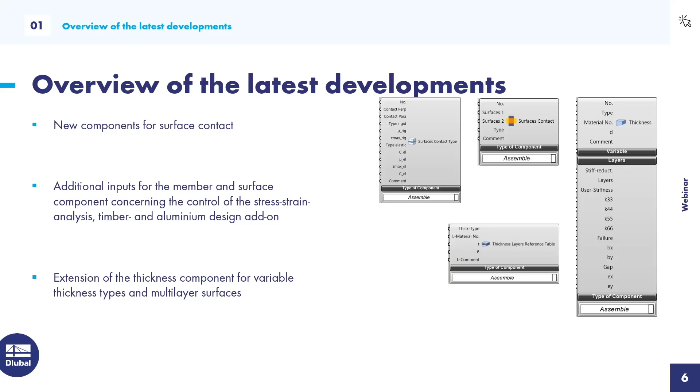I think the key feature is here the template functionality that we implemented a while ago into our export component. And the last feature that I will show here in the PowerPoint presentation is the extension of the thickness component for variable thickness types and multi-layer surfaces. This obviously will be a topic of today's live demonstration. The last feature that I would like to show here is actually related to the installation process of Rhino. So let me show you Rhino 8 in a second here.

In the past, the plugin could be installed via a specific folder in the RFEM 6 program folder. We changed it. Everyone can install the plugin now via the Rhino package manager. So if you go into Rhino and you call up the package manager, you can search for Dlubal here, and you can see the Dlubal plugin, and here you have various versions of the plugin.

An important information for you: in case you're using Rhino 7, you should use the versions with the number 7 in the front. And in case of Rhino 8, use the versions with the version number starting with the 8. For today's webinar, I'm using, let's say, an internal version. Anyway, you can do the exact same algorithm in the current customer version of the plugin.

All right, then let's switch to the second chapter of today's webinar, the live demonstration. To give you a feeling for what I'm doing in Grasshopper, I would like to show you the final structure first in RFEM, and then hop right into Rhino 8. So that's the CLT structure that I would like to model. It should represent like a bus or train station, where you can wait for your train or for the bus, and you're protected against rain and wind and so on.

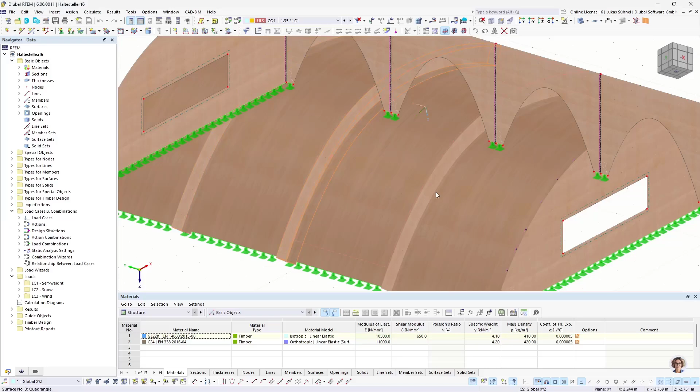So you have here these CLT wall, slab and wall elements, and inside some additional timber beams that support the roof, and on the front some openings to go to the train, and on the side some windows to see if the train or the bus is coming. Obviously a made up example, but it serves the purpose of today's webinar.

I would like to show you the workflow and some new components. What do we have here as well? We have some line supports on the bottom, and additionally some line hinges, because CLT panels are usually connected hinged. So we need the line hinges as a tool here to have the proper force transfer. That's also the most tricky part of this whole algorithm. I will explain it, of course, afterwards.

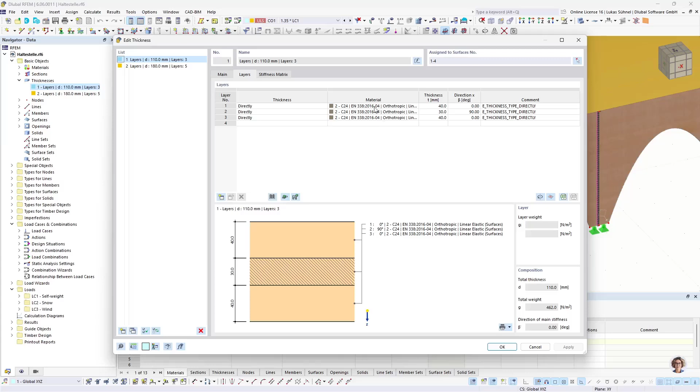And apart from that, we have, of course, our new layer thickness types in here, in which we then define the layers individually. All right. That should be it as a rough introduction of the structure. Let's go right into Rhino 8, and here I will put Rhino to the left and Grasshopper to the right in a second.

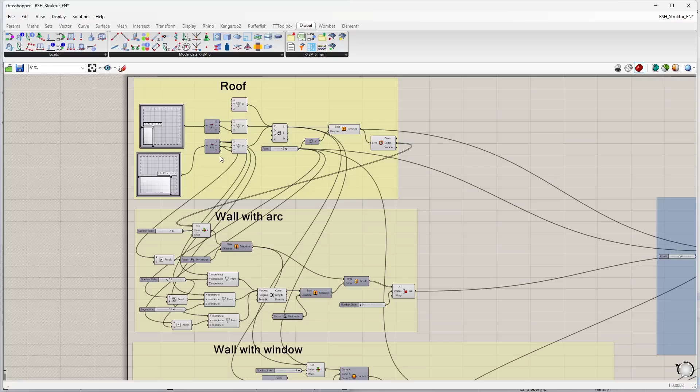One more little overview for you, what I will do in the next hour or so. I will create this algorithm here. We start with the Grasshopper algorithm, where I model the roof of the structure, then the walls with the arc, the wall with the window, then some data management, copying and so on, collecting my objects, the surfaces, the lines that I will use again afterwards, and then the connection to RFEM via our Dlubal plugin.

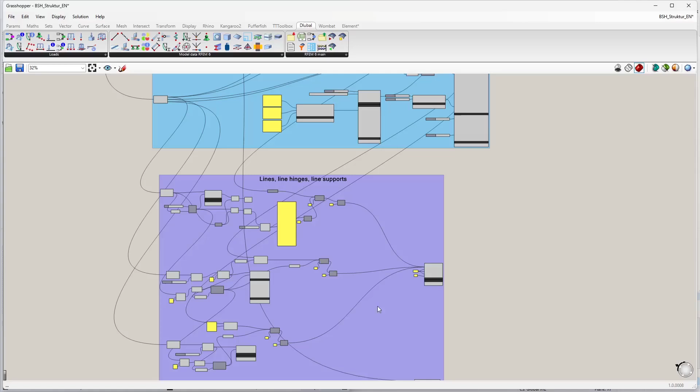I will create materials, sections and members, thicknesses and surfaces, and last but not least, lines, line hinges and line supports. All of those components then will be connected with our export component, and we get the structure in RFEM 6. All right, so let's create a new file in Grasshopper, move it to the right hand side of the screen, and start with the modeling.

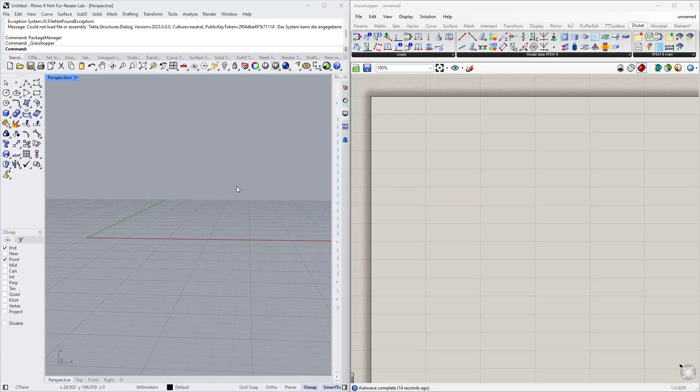As I said, I would like to begin with the Grasshopper algorithm, so I need a plan how to model that, and I will start with the roof. The roof was curved, and therefore I need some kind of a curve with the interpolate component. The interpolate component requires the nodes. You can see it basically on this little icon here. You need to define the nodes and then it will interpolate a line or a curve.

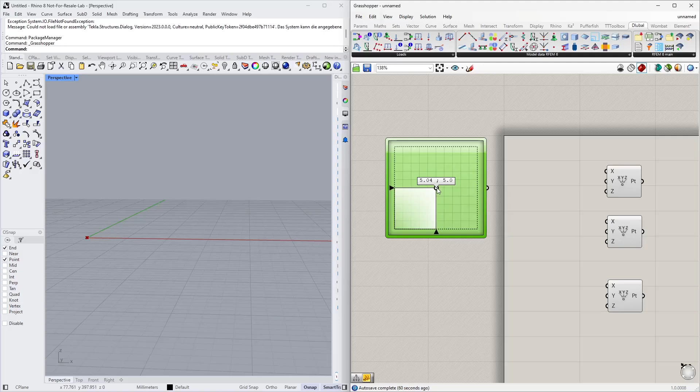And therefore I need 3 nodes and I use the construct point component for that. The coordinates of those nodes should be defined with MD sliders. This MD slider's properties will be changed a bit, so from 0 to 10. So with this slider I can define basically a node, a coordinate x, y, z. Z, however, is always 0 here, so I change x and y coordinates by moving this little dot.

Now my curve will be in the xz plane, therefore I need to deconstruct the node that I get here. So I deconstruct the node and I build it again just using different coordinates. So x should remain as the x coordinate. The y coordinate, which I can modify here, should be the z coordinate. Actually that's already the second node, my bad. The first node should be at 0, 0, 0. So that's the first node here in the center of origin.

The second node, which I can modify now with the MD slider. And the third node should also be modified via an MD slider. So same logic. Y should be set. And now I can define this arc. Let's pick some proper coordinates. And now I can connect it to my interpolate component and I have a curve. So that could be the shape of my structure, for example.

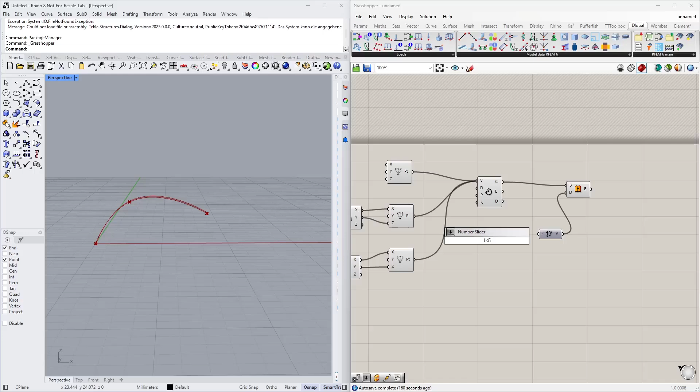Alright, now I need a surface, so I can simply extrude this curve into the y direction. And I want to define a distance via a slider, so I define a slider from 1 to 5, for example, using the metric units here in my head. So now I can extrude this line into a surface. Alright, that's already the first part of my little algorithm.

And I group it, and for a better understanding I can give it a little name. So that's my roof surface, for example. Okay. Alright, so second part is the wall on the front. Let me show it again in RFEM so you can follow easier. I want to create this wall now with the arc-like opening.

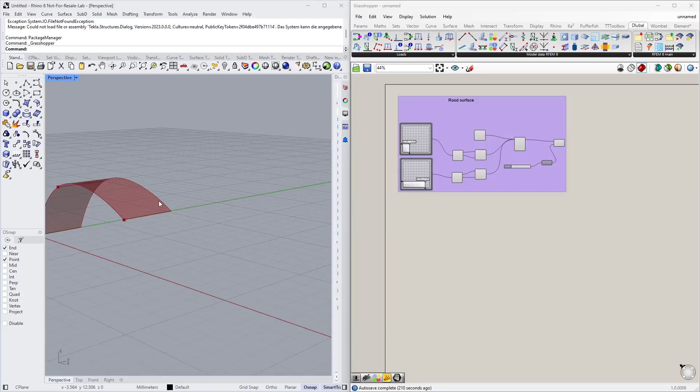So what I need for that is this line here, and I want to extrude it into the Z direction. To get access to this line, I will deconstruct that surface. Therefore I have here the deconstruct brep command. I link it to my surface.

Now I have here the faces, the edges, and the definition nodes. And I need just one of these edges, so I take a list item component, connect it here, then define the little slider to select the line from that list. Let's see which it is. Index 0 is the one on the end, on the bottom. Index 1 is this arc. Index 2 is the line that I need.

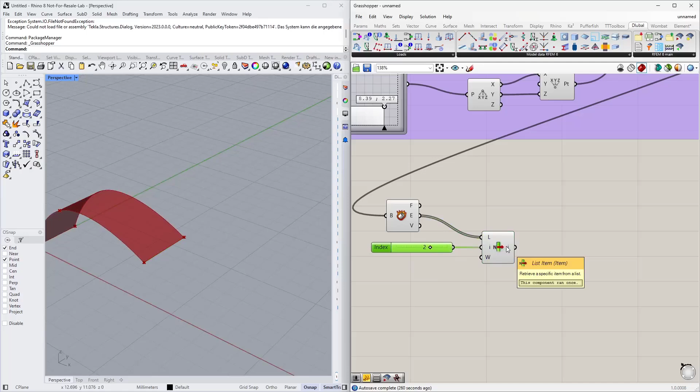Alright, so I have this single line in this component now, and now I simply extrude it again in the Z direction. And we can already see it is the wrong direction. So I probably need to multiply it by -1. And the coordinate itself comes from my arc or my curve that I defined in the beginning. It's the Z component or Z coordinate of that node. So obviously the Y coordinate here, and multiplied by -1.

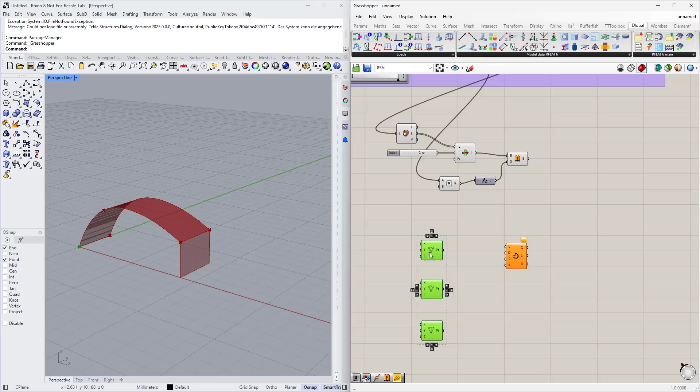Now I need the opening. For the opening, I also use the interpolate component again, and I need again 3 nodes. All right. Sorting can be done at the end of the day. So where should the first node be? Basically, all of the nodes have the same X location as the wall or the end point of my curve. So the X coordinate is always the coordinate from the last point of my curve. And now I need to modify the Y and the Z coordinates.

The first node should only move slightly in Y direction, so I make a small number slider, and I want to have floating points, so I change the type of it and connect it to the Y coordinate. So this distance that I define here via this node is basically the length of my wall support on the bottom.

The second point should be in the center. Center basically means the dimension of the extrusion divided by 2. So divide by 2. Link it to the length of the extrusion, and that's my Y coordinate for the center point. And I need a number slider to modify the Z coordinate. Maybe also with floating points, so like that.

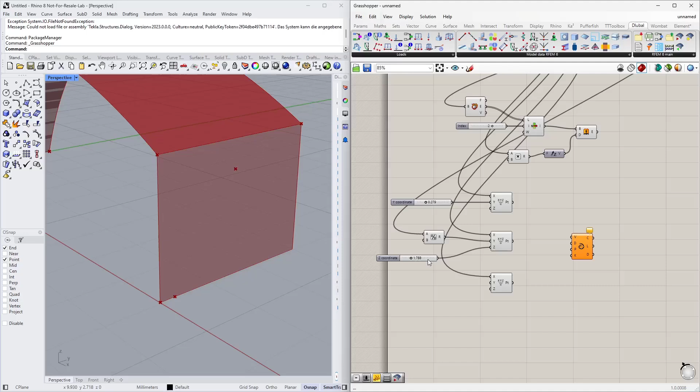And the last point is again on Z on the bottom of the surface, and it should have the same distance as the first point. So again, I just do a little subtraction. I subtract my required support length from the extrusion length. That's the Y coordinate. So whenever I change the length of the support, it will change on both sides. All right, these are my 3 definition nodes for my curve. And now we can see it.

The next step is, let's say, like a trim command. I would like to cut out this part of the arc from the rest of the surface. I can do that with the component split brep. The base surface is this one, and the so-called cutting shape is a surface. So I need to extrude my arc again into X direction to get a surface for it. So actually extrude first, in X direction. Yeah, just any surface. And now I can use it to cut the original shape.

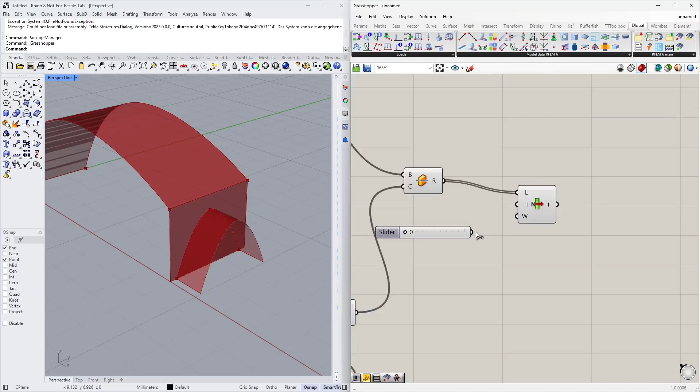I get here 2 surfaces now. I just need one of them. So again, a list command to pick one of those indexes, and a little slider to select the right one. So index 0 is, let's say, the surface of the opening. Index 1 is the remaining surface, and this one I want to keep. So let me hide some of the other objects to see the result of my little algorithm. That's the remaining surface. That's the one I need for later.

So I already finished the second part here. Again, I could give it a name. Arc, surface, whatever. Just so that I can easily understand what I'm doing even a couple of weeks later.

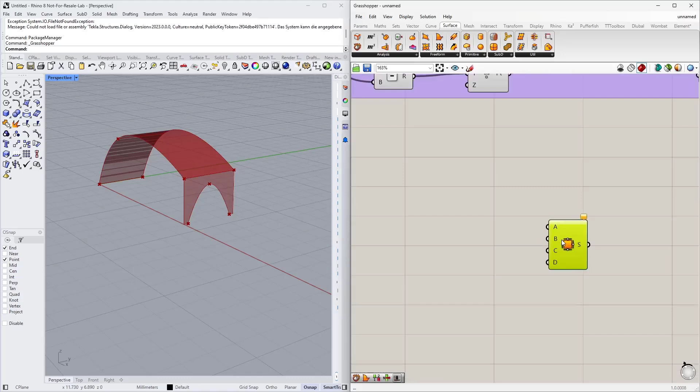And now the last surface is the surface in the front. To create that, I would like to use the edge surface component. I only have to define the boundary lines. One of my boundary lines is, of course, my curve that I defined in the beginning, like from the roof. And the second curve for my surface should be this side line of my front surface.

So again, I deconstruct this surface here in the front, and I try to select this line here on the side. Again with the list item component.

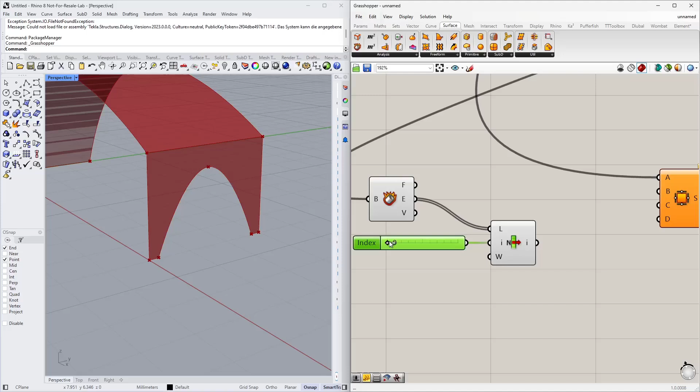Let's connect a slider to it, and now let's go through these lines to see which of them it is. Oh, sorry, the edge lines, of course, obviously. So that's the other side. Oh, come on. Yeah, now I have it already, index number 2. It is, yeah, that's the line I need. So I connect it again to that surface component, and I already get the final shape.

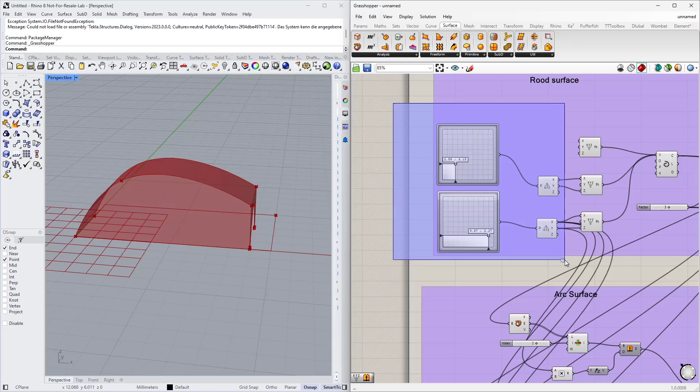So far so good. Now I need to cut out a rectangular hole in here. Same logic as before. I will create the rectangle in this case by 2 points. Yeah, the 2 points are A and B. And then I extrude the rectangle and then cut it again from the original surface. These 2 definition nodes of the rectangle can or shall be defined again via an MD slider. So I just copy some of those things here, copy, paste, and I will reuse it down here.

This time, yeah, no, actually that's already okay. I can connect them as definition nodes for my rectangle. The rectangle can be placed in any plane, as you can imagine. So I can define the plane by setting it here graphically, or in the Rhino lock, or however you call this area here on top. And I would like to have the rectangle in this ZX plane. Okay, yeah, that's now on the right plane.

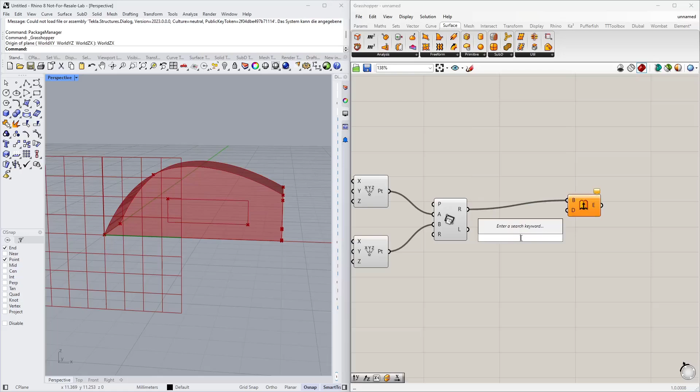Let's set some proper coordinates for the rectangle. So maybe that's the size of the window that I would like to have, and now I have my rectangle here. Again, I extrude it into the Y direction, and now I can use the split command again, split brep, to cut out a hole. Let me copy the list item that I defined on top here. Again, I want to keep only one of those surfaces, and this time I think it is the index 0.

Exactly, yeah. So let's hide some stuff to see the result of our work here. Yeah, that's the remaining surface with the opening, the rectangle opening. All right. That's already the basic geometry that I need. And now I can copy this stuff. Sidewall, let's say. Okay. Now let's copy the surfaces. That can be done with the move command or move component. And which objects do I want to copy? Of course, my roof surface and my front surface.

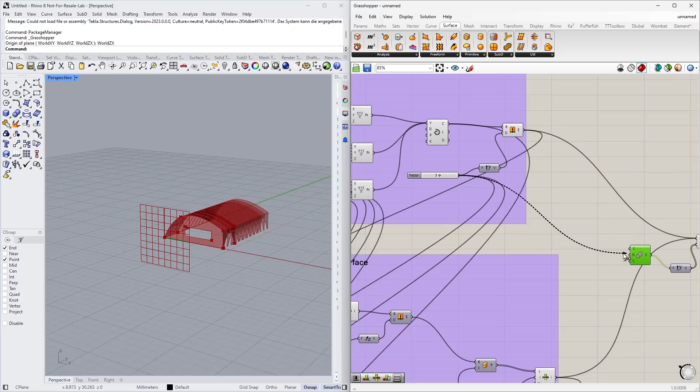And the default is set, as you can see. Yeah, it's copying it in the vertical direction, which is not correct. I want to copy them in the Y direction. And I want to copy them multiple times. For copying something multiple times, you can combine a move command with the series component, and as a step I would like to use the extrusion length, of course, to have them placed next to each other. Now I can control the amount of copies with a small slider, let's say 4 copies. All right.

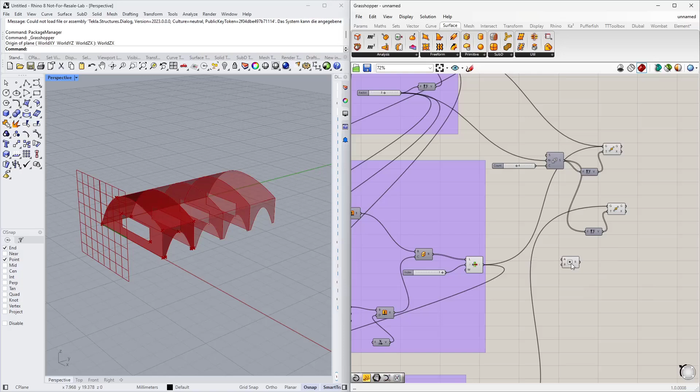That's a big part of the structure. Now I only have to copy the front surface to the end. So I use another move command for that. And I copy this surface. Of course, not multiple times. I only want to have it one time. And then the distance for this is actually a little multiplication. We simply multiply the extrusion length with the amount of copies. And that's the length that we need to copy it from the front to the end. Okay. So far so good.

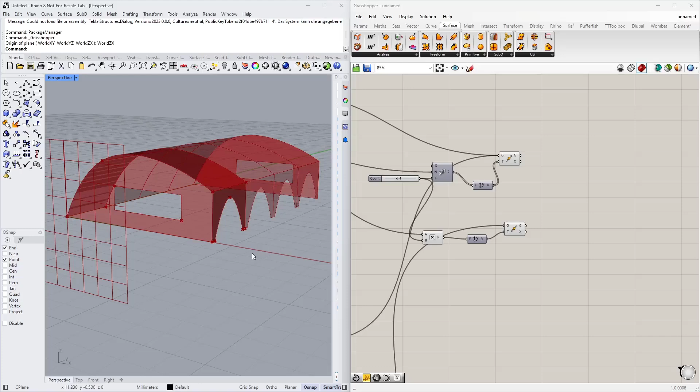The geometry is done. What I need now is a little bit of data management, because afterwards, thinking of the RFEM 6 connection, I need a collection of lines. I need the collection of lines on the bottom, all of those down here, because on those lines I would like to assign a line support. And I can use these lines in my line support component to export it to RFEM 6 afterwards. Additionally, I need these 3 internal curves, because I want to assign a member or a cross section to them. And maybe also a collection of all of the surfaces that I have.

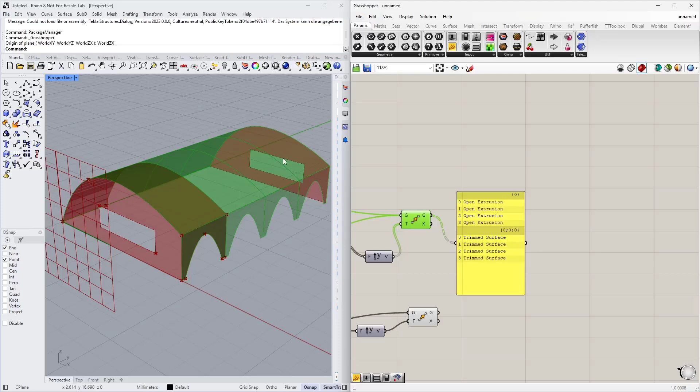So maybe let's start with the curves for the beams. How do I get those? They are basically inside that component. This component contains all the surfaces from the roof and from the front. Now, if we take a look at the data in that component, we see that it has 2 groups. Let's call it 1: 4 open extrusions. These are my roof surfaces, and in the second group, my wall surfaces.

So what I can do here is I can explode this tree and get each branch of my tree, or get access to each of these branches. First branch, second branch. And the first branch, as I said, contains the surfaces of the roof, and I can deconstruct them again.

So you can see it here again. Those are the surfaces, and of course the boundary lines and so on. And now I would like to select only these internal curves, so basically just one of those lines per surface. So I need again a list item component from my edges, and let's see which of the index numbers it will be.

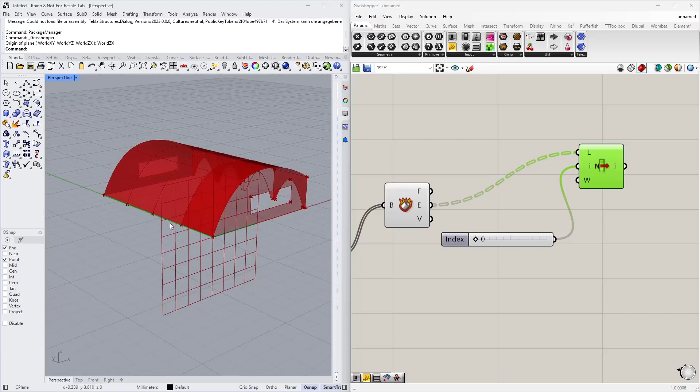Index 0 is the lines on the bottom. I need that maybe later for my line supports. I'm looking for the roof curves. And index number 1 is the one that I need. It contains these curves. However, it contains 4 and not just the 3 that I need.

So what I can do now is get rid of the last index from that list. Currently, it is not a list. It is, let's say, a tree. On each branch of the tree, I have 1 curve, but I can make a list out of it by flattening this tree. And now I remove the last index. It can be done by using the cull index component. And the last index can be defined by a panel with the -1 value. And the remaining lines are the ones that I need for my beams.

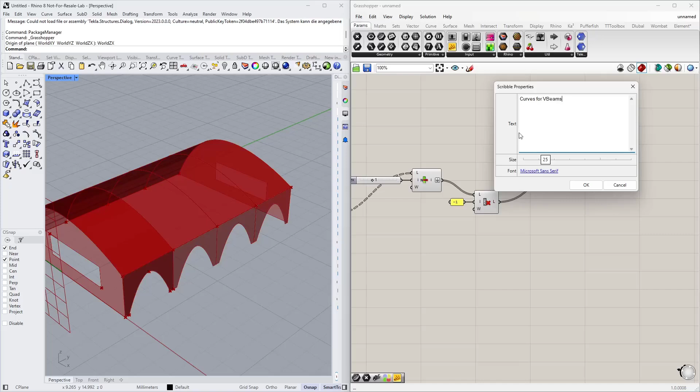So let me collect that in an additional component so I can easily reuse it afterwards. Maybe again a little comment here: curves for beams. Okay.

Now, the second part should be the curves for my line supports. We already saw it in that component. Here I can select the curves on the bottom of those roof surfaces. It was index 0, so that's already one part for my line supports. And the other bottom lines are included in the wall surfaces.

So basically I can copy this part, connect it to my surfaces here in the front, and now look for the index number of those walls. Which of those lines are the ones on the bottom? So I scroll through that. Index number 1, as we can see. And now my slider is not long enough, but I can tell you that it's index number 5. So I need index 1 and index 5. So I create a little list, 1, 5, and connect it to that component.

So this list item gives me now 2 lines, index 1 and index 5. And you can hopefully see that it's the line on the bottom, on the right and on the left side.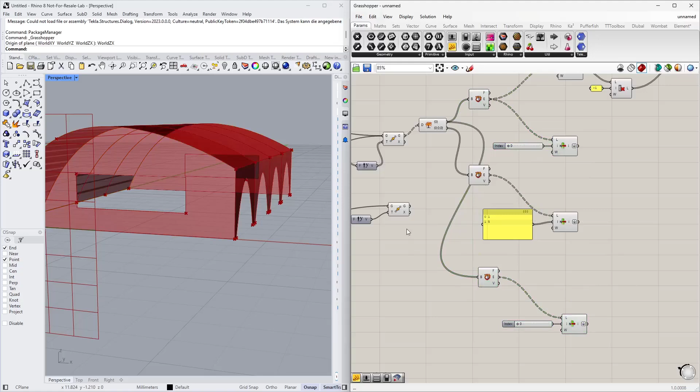Now I need the bottom line from the side surfaces. Same procedure. I copy again this part. I connect it to my, well, actually I need 2 surfaces: the front surface, which is down here, and also the copied surface from the back. And from both surfaces I need 1 line. We can already see it is index 0. So in here I have now 2 lines, and these are the lines that I need.

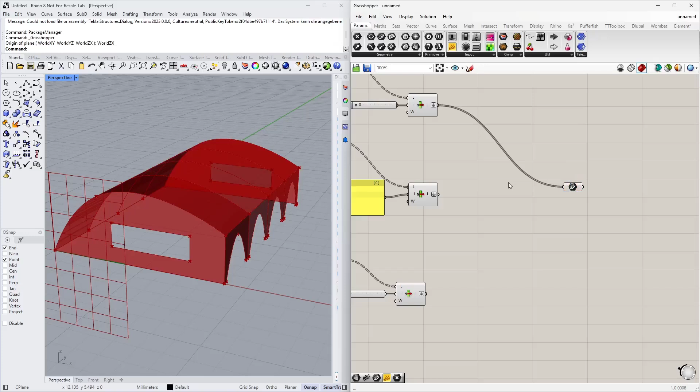I can collect all of them in one component again. So just connect them to the curve component, and that component contains now all the bottom lines for my line supports. So again, give it a little description: line support lines. Okay.

And then I also collect my surfaces in a surface component. I think most of them are contained in that component where I copied them. And additionally, I have the front wall and the wall on the back, which is in here. So this surface component contains now all surfaces. All right.

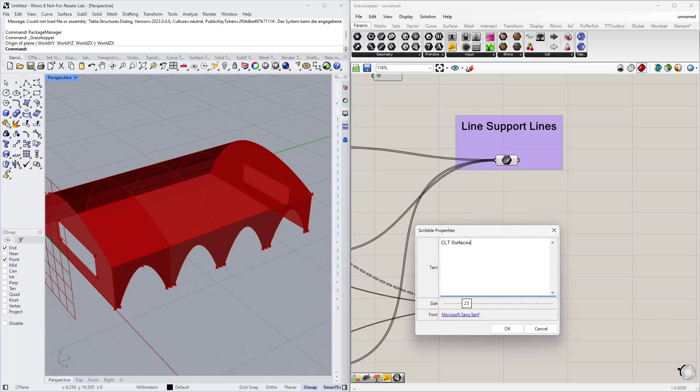So far, so good. Now, the next part is the connection to RFEM 6. Therefore I need my Dlubal plugin. Let me increase Grasshopper for a second. The Dlubal plugin will show up after you install it, and it is divided in 3 parts. We have the model data group, which contains most of the basic objects: nodes, lines, members, surfaces, materials, sections, also components for solids, for thicknesses, supports. I think most of the stuff that you need is implemented in here.

We have another group which is called loads. In here you have components to create load cases, load combinations, but also the loads: nodal loads, line loads, member loads, surface loads, but also imperfections, in case you want to assign them as well. And the last group contains general components, for example the export component, import component, a component that allows you to run the calculation of RFEM 6 via Grasshopper, or other components. For example, as I said, I use in the internal version the global mesh setting component.

All right, how do we start? I think RFEM gives us a nice hint here. The data navigator in RFEM shows us the basic objects and then specific objects, types for nodes. And it's kind of the logic that you use when you're defining your structure. First you define materials, then the sections and the thicknesses. Then you continue maybe with members and with surfaces and solids and so on. And the same logic we use in Grasshopper. I start with the definition of my materials and sections.

The material component can be found here. A material can be defined by the index number that it should get in RFEM 6 and the name. The name ideally equals the name of this table down here. So you can define your material in RFEM and copy the name. By the way, to get the full name, you can check the program options and see if you have the full section and full material description activated in here.

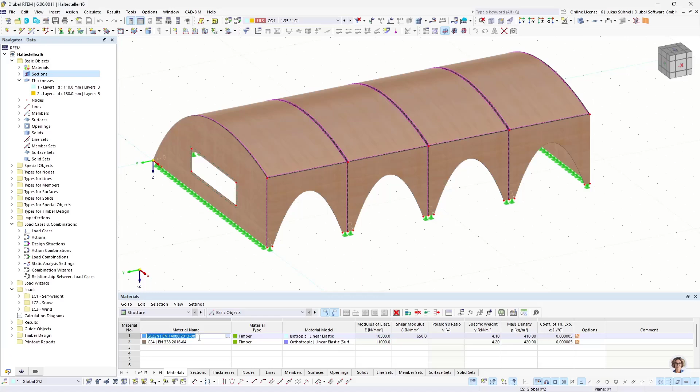If you do not have this option activated, you only see GL22H - the code related part of the name will not be shown. But to have a clear assignment of a material, you need also the standard, so we can copy that name and paste it into Grasshopper.

Alternatively, if you had previous projects and already defined materials and sections, you may have created your own little library of materials and sections that you use again and again. That's what I did - I defined here a value list and put my own information into that value list.

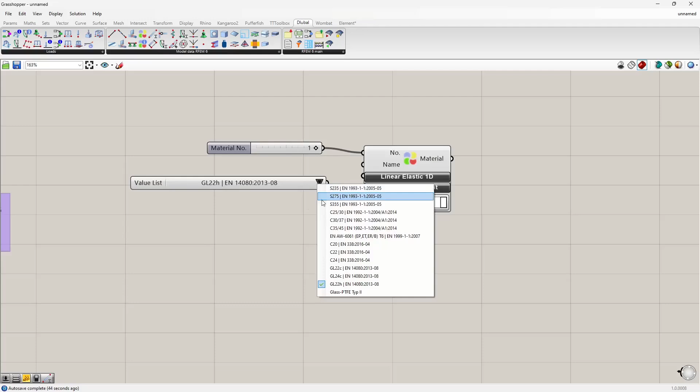You can edit this value list and insert the names into it. That's the name that it shows here, and that's the name behind that little description - identical for me here, but you can simply copy these things. Then you select the material you want from that list and assign it to the name input, and that's all you need to do.

I copy my material - I need a second one. Make sure you change the index number. Then I select here the material C24. The first material is for my beams, and the second one should be for my CLT surfaces.

For surfaces, we have to use the orthotropic 2D material model, or at least that's what I want to use. So I use a value list to read the options of this material model input and select orthotropic 2D.

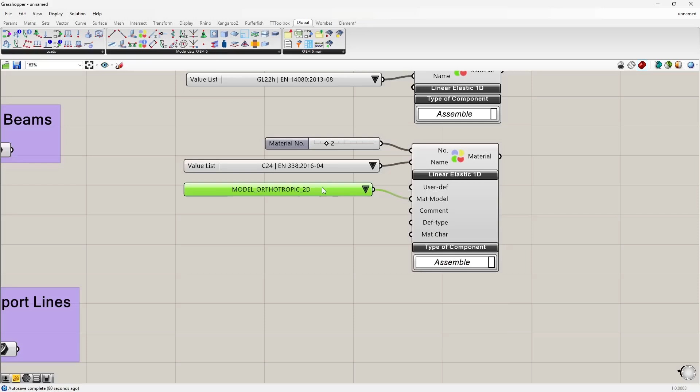Now, the next step should be the definition of a section. We have the section component for my beams. Again, I assign a name, a number, and I have to assign a material and the name. The material I can link directly from the material component to the section component.

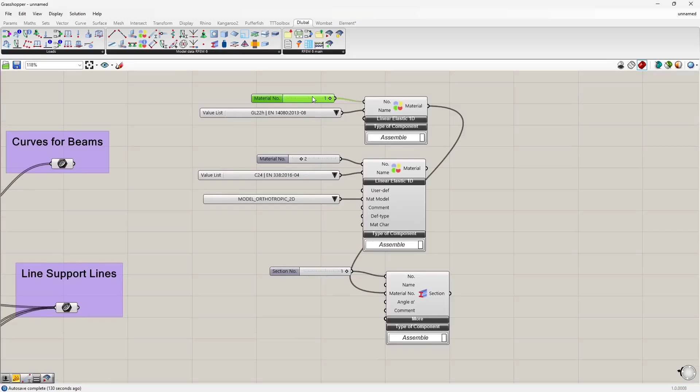This step can only be done if I define the index number first, because what we expect in this section component is the material index number - 1, 2, 3, 4, 5. To transfer it from that component to this one, I have to assign it here first. If I do not assign it, this connection will not work. That's why, personally, I define usually all these index numbers for all my components, so I can link them together.

Now the last thing is the name. The name is quite easy - it's RM1, rectangular massive section, then the width and the height. I could copy the string and paste it into Grasshopper, or build it parametrically. The name is just a bunch of strings combined - text, brackets, and the name consists of the part RM1, then a value for the width of my section.

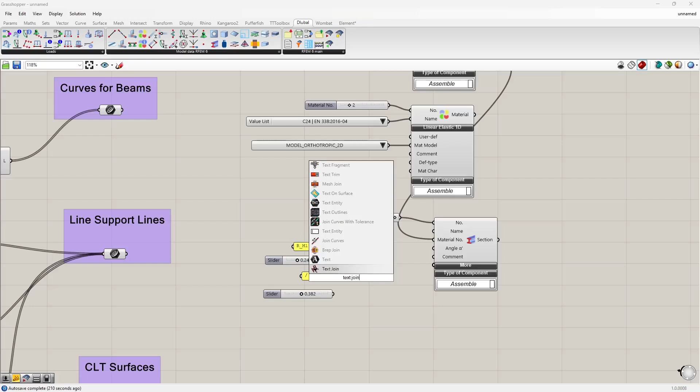And I use here a slider from 0 to 1 - I'll explain it in a second. Then the next part of the name is the slash, and then another slider for the height of the section. All these parts of the name can be joined by a text join component - you just plug it into this input here.

And you get the name, or you get one string out of it. Let me show it - here we are missing the space. Okay, so that's now the name according to RFEM.

There is just one little difference. You can see here I'm using, let's say, meters in my mind - 0.24 meters and not millimeters as it is shown in RFEM. This has the following reason: the Grasshopper link is based on our web service, on our API, and this API expects SI units. So I have to define the dimensions of my sections in meters, so that I get the right size in RFEM.

Therefore a scale between 0 to 1. Now I can link it to my name input and the section is done.

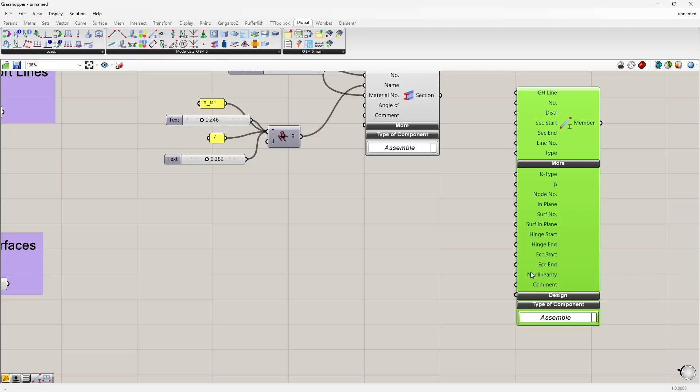Last step for this first group here is the member component - let me show that too. A member component with some basic definition inputs. Under 'more' you can find options for hinges, eccentricities, nonlinearities or rotations for the member, and under 'design' related inputs. Let's start at the beginning.

I need the Grasshopper lines for my members - these 3 lines. Let me rotate the structure. These are the 3 beams, and I already collected them in here. These are the curves, and I connect them to my member component.

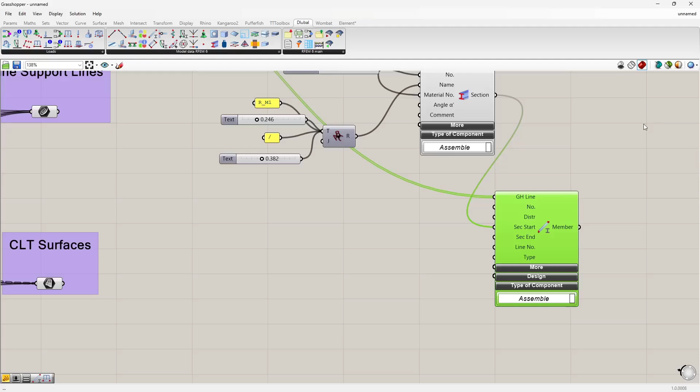The section should be this rectangular section, and that's basically it. There's just one thing that I'd want to define in the member, related to the design. I have timber beams here, and I would like to feed already some timber design related settings, so that when I export it to RFEM, I have most of the information already defined for the design, and I just have to calculate it.

So I have some inputs here, as usually for steel, aluminum, then T for timber, and for timber I can define the type of the effective length, or the index number of the effective length type, and the index number of the ultimate limit state configuration, or the index number of the service class.

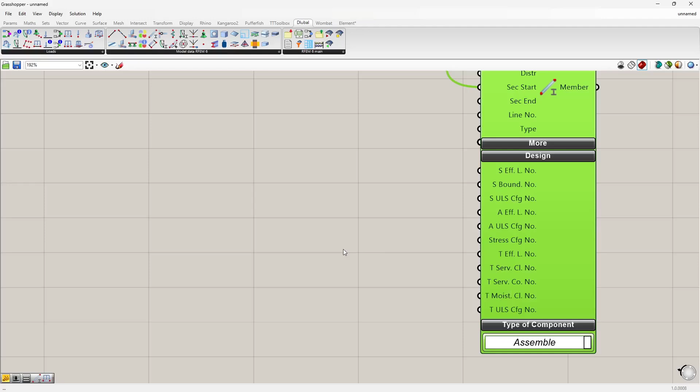I can't define these classes in Grasshopper, but I can define the index number of the existing type. Now you may ask, which existing type? We never defined them. That's where the templates come into play, and I will explain it at the end of this webinar, how it is working.

So let me define these types. I used index number 1, and again, more details I will show at the end when I explain templates. So that's already my first part. Let's group it: materials, sections, and members.

Now the second part for my connection to RFEM are surfaces and thicknesses. Let's have a quick look again at RFEM. A surface consists of, usually the main input for a surface is the thickness type, what material and which thickness is defined in here, and it will be assigned to the surface. So let's have a look into the thickness type itself.

Here we have different types: uniform, for concrete slabs, uniform thickness type, variable, and also layers. In case of layers, we have a table included where we define each layer, the material, the thickness, and the direction of this layer.

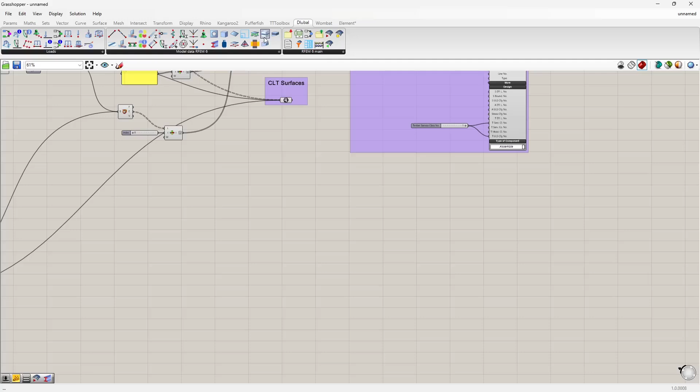Okay, that's what I have to define here, or in Grasshopper. So let's start with the thickness component, which we have here. The thickness component, again, needs a number or an index number. Then the type, I can use the value list for that. In 99% of the cases, the tooltip will tell you what kind of input is required. You can see it here, value list. So I connect it.

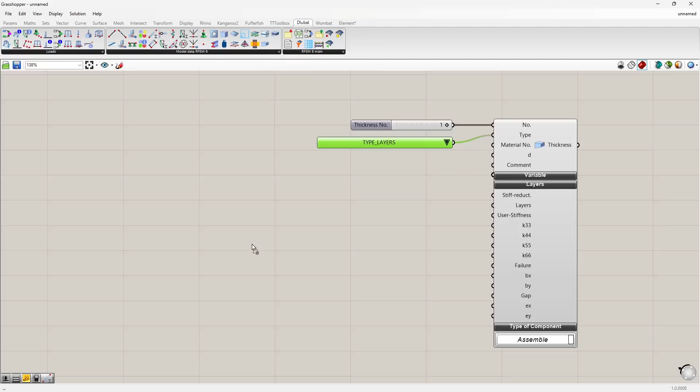And I can select here layers. In case of layers, I can open the layers tab in this component, and here I have the layers input. The layers will be defined in an additional component. We had to split it up. So in that additional component, I define the material, the thickness, and the direction. This little table that I displayed in RFEM 6, this information will then be transferred to the thickness component.

All right, the material should be material number 2, C24, orthotropic material model. The thickness can be defined in a little table. Let's say 0.4, 0.3, again meters, 0.4. And that should be a list.

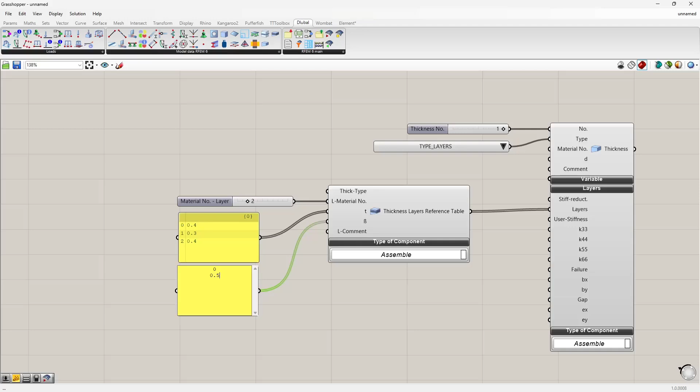And the same logic for my rotations. The direction of each layer should be 0, 0.5 multiplied by pi, 90 degrees, and 0 again. This is the little subtable which I showed in RFEM, and it is connected to the thickness component.

We have a lot of additional inputs in here. I can show them as well in RFEM. I do not use them today, but in case you want to apply a stiffness reduction to these CLT thicknesses, you can activate them with this button, and then you have access to these modification factors and additional options, and all of them are included in our component, as you can see here.

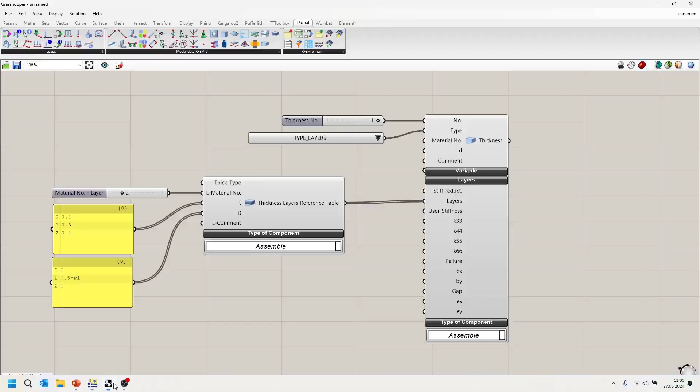So that's the thickness that I want to create. Now I need to connect it to a surface component, and the surface component expects additionally the Grasshopper surface.

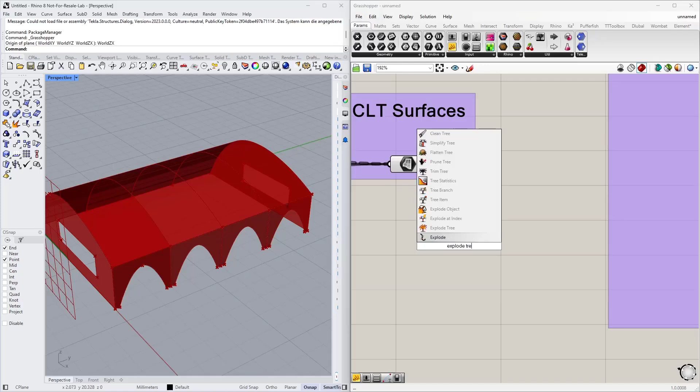Now I want to use that thickness type for the roof surfaces. That surface component here, let me show it again like this, contains all surfaces, again in a tree-like structure. I showed it before, 3 groups. My roof surfaces are in group 1, so what I will do here is explode the tree that I have here.

I need it later as well, use the surfaces from the first branch for my surface component. The last step here is the numbering. As I said, I tend to number all my surfaces, so that can be done with the series component. This number, the index number, starts with the value 1. So I define here for the start index number 1. The step is of course 1, 1, 2, 3, 4, and the amount of index numbers that I need is linked to the length of this list. I have 4 surfaces inside, depending how many copies I create in my Grasshopper algorithm.

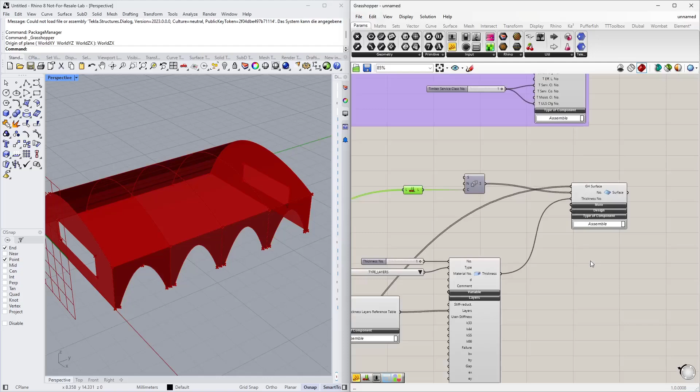So the length of that list is basically the amount of copies that I need. I can count the length with the list length component and connect it here to the amount of copies. Now I get a list of 4 index numbers, 1, 2, 3, 4. That's what I need for my surface. All right, that's the surface component.

And now I need another surface component for my walls. So I simply copy all this stuff.

Copy paste. This time I want to use the remaining surfaces. So these are my front surfaces and these are my surfaces from the side, and I connect it as Grasshopper input.

Concerning the thickness for the walls, here I would like to use 5 layers, so I simply copy them. Okay, same for the directions.

And I need to change the index number, obviously, of my thickness. That's second thickness, so index number 2.

Again, the remaining part is the numbering of those surfaces. I will use a series component again, but I'm not going to start from index number 1 as I did before. I need basically the last index number from this numbering plus 1. That's not difficult. The last index I can read via a list item component, and I select here the last index, using -1. So I get the value 4 out of this component, and then I add 1 to it, so +1. And now I have here index number 5.

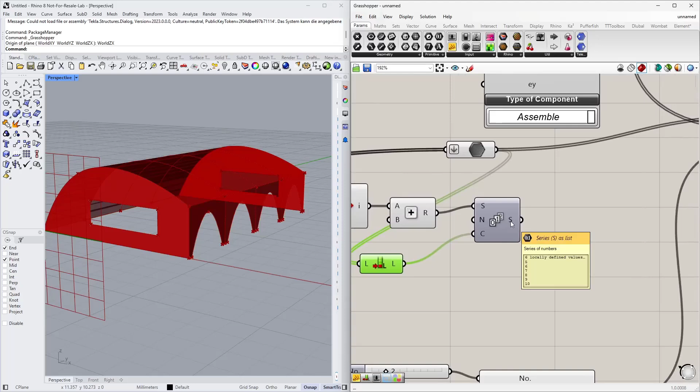This is parametrically defined depending on the amount of copies and so on, and this is my new start value for the numbering of my walls. The step is again 1, and the count is basically the length of that list. Again, it is not a list, it is a tree structure, as you can see here, but if I flatten it, I have a list, and now I can read again the length. Here it is. The length of that list is the amount of copies that I need. So I have here the numbering 5 to 10. That's exactly what I need. 6 values for the numbering, 6 surfaces.

That's good. All right. One more thing that I would like to define here is a mesh refinement. Why? Simply because the default global FE mesh length is 0.5 meter. We have here a distance of about 0.3 meters. So let's have at least 3 elements over this length. So I would like to use an FE mesh for those wall surfaces with a mesh length of 0.1 meters.

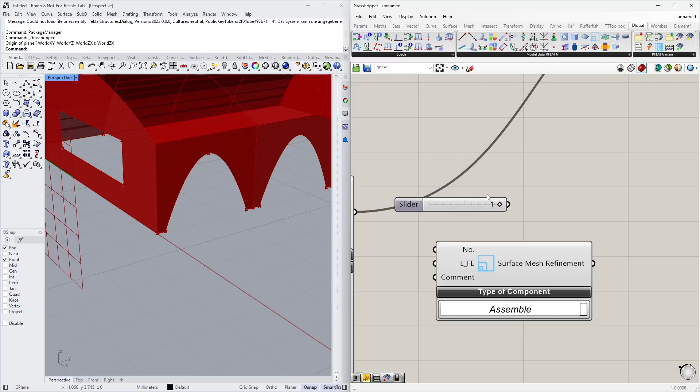Therefore, we have these mesh refinement components. Here's the surface mesh refinement component. I assign the index number and the required length, 0.1. All right, and I simply connect it to the mesh input.

Now, what I forgot also on the surface on top is those are timber surfaces, obviously. And again, I would like to define some things for the design afterwards, the service class and also the ultimate limit state configuration. Therefore, I assign here type number 1 for the ULS configuration, and the same here. Let's extend the design tab, ULS configuration, service class. All right, explanation will follow afterwards.

Now, this is the second big group for the connection to RFEM 6. And now the last part, which is related to the line hinges. This is the most tricky part, I would say, in that example. So let's have a look inside RFEM, how they are defined.

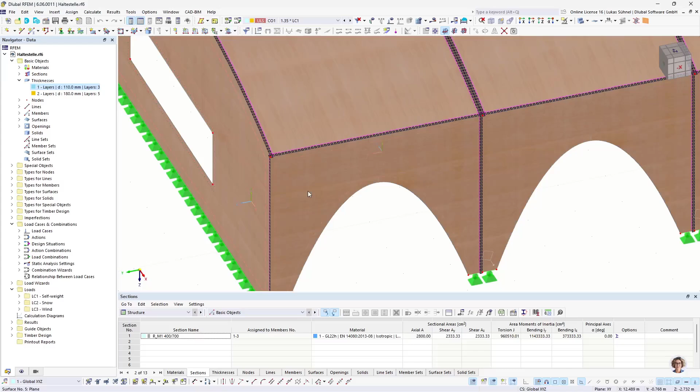Line hinges, as I said, control the force flow between surfaces. And we find them under types for lines, line hinges. Let's have a look. I have just one type here for all of the surfaces. And what we can control here is the hinge conditions, which force should be transferred and which not.

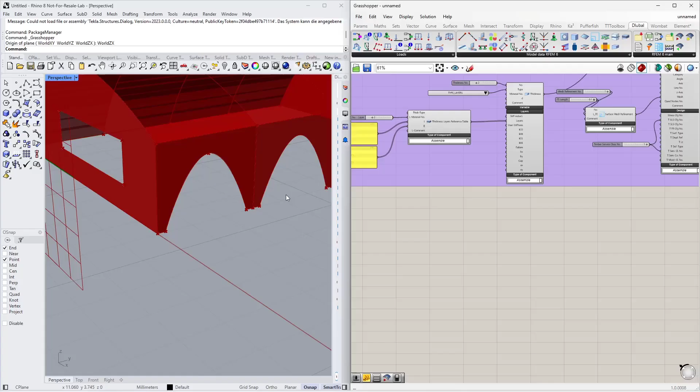So I have to build this string in Grasshopper, and therefore I need the index numbers of my surfaces and of my lines where I would like to have a line hinge. So let's have a look again at Rhino and Grasshopper.

I do have a numbering for my surfaces. Yeah, I did that here. But the lines where I would like to have a line hinge are not numbered. So let's start here. I assign an index number to my lines. Therefore, I use this line component here. And the line component requires the Grasshopper line and, let's say, the index number that I want to assign to it.

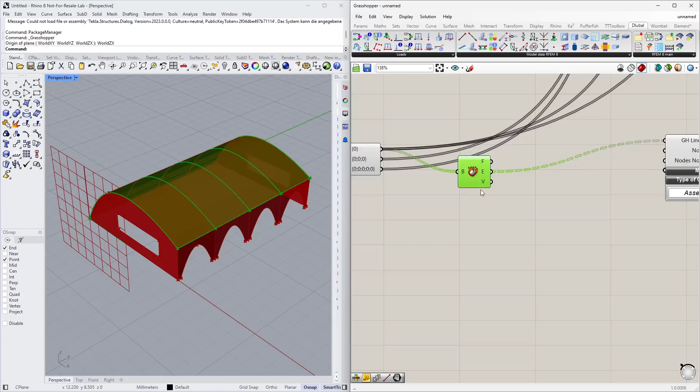The lines for the roof are included in the roof surfaces. I did it multiple times already. I can deconstruct those surfaces. I get my edges out of them, or I get here the edges of those lines, and I can simply say these edges should be numbered, and the number should be starting with the index 1 until the amount of lines that I have here. So I need a series component.

The series component, or the number, should start with index number 1 again, and the amount of copies depends again on the length of this list. Yeah, let me show it quickly. I have here 16 lines, but grouped again. So what I will do is I will make a list out of that group. List length. So I want to use this list.

However, I flatten this tree to get a list, and the last index, 16, I will use for the count. So I get now the values 1 to 16, and these are my index numbers. Sorry, wrong input. Here, number. I also flatten this input here for the Grasshopper line because I need to combine list and list. Otherwise, I will get more lines afterwards. So I have to combine a list with a list. So far so good. All my lines from my roof surfaces have an index number now.

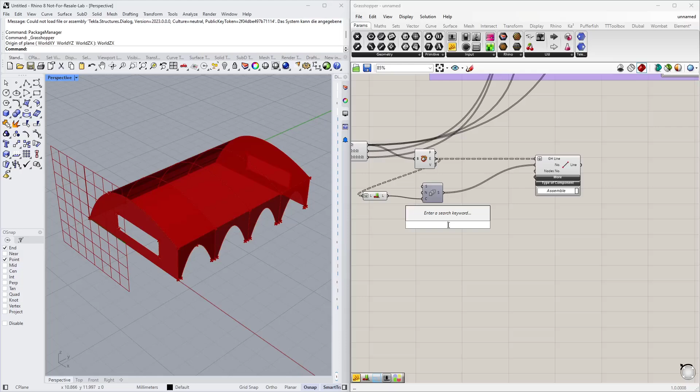And now I somehow need to combine my surface index numbers with my line index numbers. How can I do it? I can do it maybe by collecting the numbers of my surfaces again down here. So this series component, if you remember, contains the 4 index numbers for my roof surfaces. So let me simply bring them down here. So again, I have the same list now here. And let's have a look how the values are shown. I have here the list with the 4 values, and I have here my 16 index numbers for my lines.

If I want to group them in a way that I have always surface 1 with related lines, surface 2 with related lines, a tree-like data structure would come in quite handy. So what I can do is I can graft my numbering to a tree. So each index number will be transferred onto its own branch. You can see it here now. Each of these branches from my tree has 1 value. So I have some kind of grouping now.

And the same grouping I need for these numbers. I would like to have the lines that are related to one surface in one group. I have it already somehow. I have it here. Each surface has these 4 lines, or they are grouped, let's say. And this grouping I would like to assign to my numbering here. How can I do it? I can deconstruct the path. Oh, wrong. Deconstruct path. I can deconstruct the path that I just showed here, where the lines are grouped.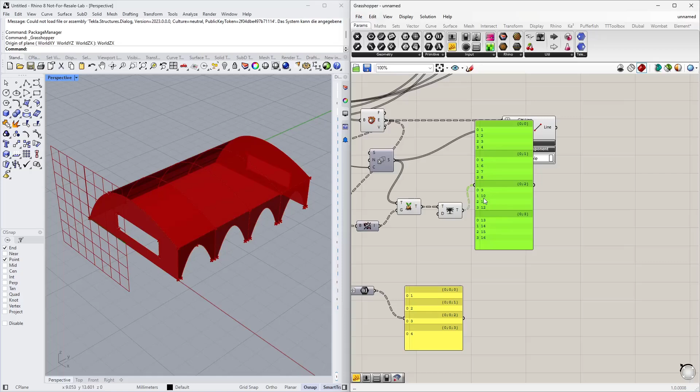Before I do that, I have to get rid of one of those index numbers, because I want to define a line hinge. Or let's say differently, I do not need a line hinge on the bottom lines. I have a line support down here. There's no reason for a line hinge. So I get rid of the index number 0, which is always the bottom line for each group. Easy task, cull index. So we remove one index from the list, the index with the number 0. So now only 3 lines will remain here.

And how can I build the string that I need for my line hinge now? I can use the text join component a couple of times actually to get the desired result. The first thing that I will do is I need these index numbers, the line numbers, split with a comma in a string, not in a list as I have it here. So I join them, and each value should be, is it a comma? I guess. Yeah.

Each value should be divided by a comma. So let's see the result of that. Yeah. 2, 3, 4, 6, 7, 8. Okay. Now I can join my surface numbering with the line numbering.

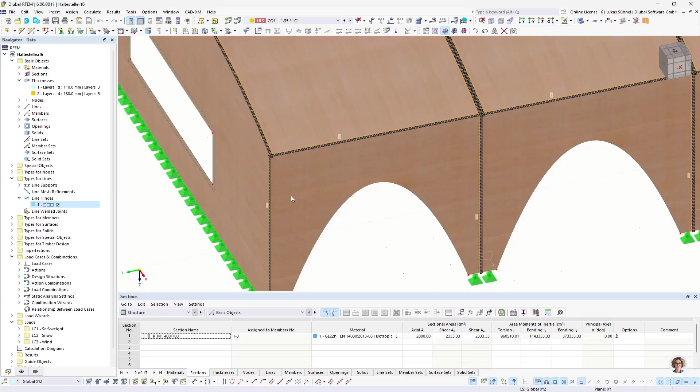So index number 1, surface 1, and then the 3 lines in surface 2 and the 3 lines. Similar to what we have in RFEM. Let me show it again. Surface 1, line 2 to 4. Doesn't matter if we have here 2 to 4 or 2, 3, 4. RFEM will accept our description method, and so on.

And now I need it in one long string, or that's my requirement at least. So I will flatten this result and join it by a semicolon and a space. Okay, and now the result looks like this. And this is exactly how it looks in RFEM.

So far so good. Now let me use a line hinge component, assign a number to it, assign this string to it that I just created and define the connection. So I would like to fix all forces in each direction and release the rotation. You get the information as a tooltip in here. Free rotation is defined by the value 0. Rigid can be defined by inf for infinite, and any other value will be in Newton per meter, in case of a spring.

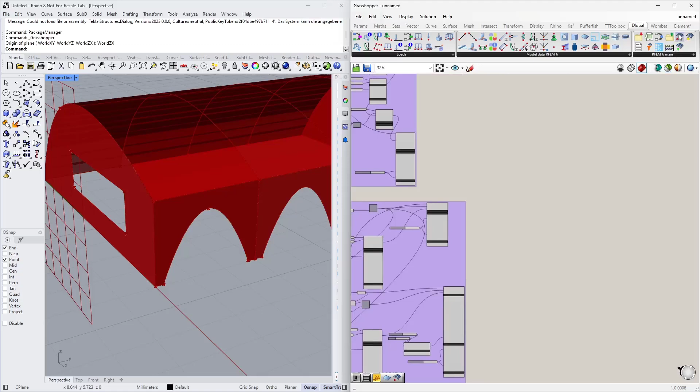You need to number the lines where you would like to have a line hinge. You group it as I did it here, and then you can create this string, assign it to the line hinge component, and you get the line hinges on the desired locations. If you did all that, the next step would be to connect it to an export component. We have it here. That's the export component.

Which inputs are required for that? I tend to use a Boolean toggle to run the export. I set it to true if I want to start the export. And if you leave it on true, it's like a live link. Whenever you change something in Grasshopper, it will trigger another export, or you just set it back to false to stop it. The input is basically the connection between all our Dlubal components. So each of these Dlubal components have to be connected to the input.

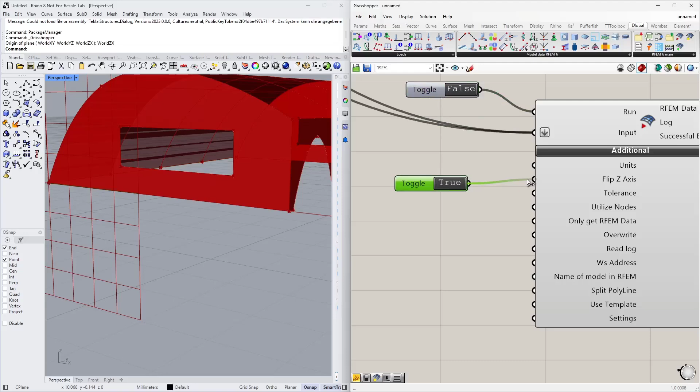Oops. I will skip it here because I will switch in a second to my final example, but you can imagine what you have to do here. And then we have some additional options. Flip the z-axis, which I usually use again via Boolean toggle, because the global z-axis in Rhino shows upwards, in RFEM, at least in my case, downwards. So I flip the z coordinates here.

What else do we have? We can define the name of the file in RFEM after the export. I don't know, example. So if I export it in that way, the RFEM file will be named example afterwards. And the last feature that I would like to show here is the use template function. I mentioned it a couple of times when I defined my members or surfaces, and it's quite a strong tool, I would say.

As you probably noticed, not all of the objects that we have in RFEM can be defined in our plugin. We are working on that. You saw it in the beginning. We extended a couple of components, we defined new ones, but not everything is included in here already. If there's something missing, then you can't use it, obviously. But we thought, maybe it would help if you can use a template from RFEM. What's that? Let me go into RFEM quickly.

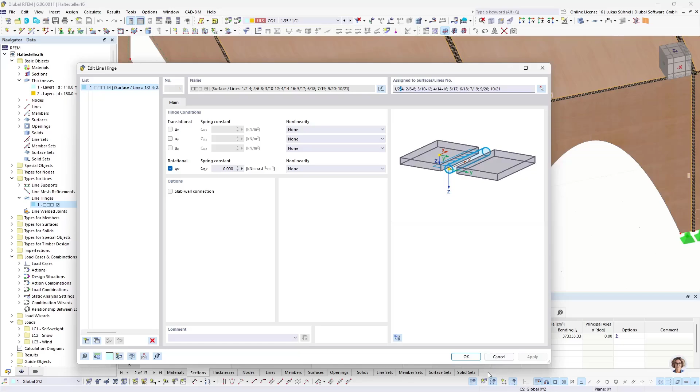A template is basically a file which already contains specific things. So what you could do, for example, is create a new RFEM file and define some things in there. Maybe some materials, or some sections, or you define already the load cases in that file, the load combinations, or add-on related stuff. You define here the service class types that you would like to have, or the ultimate configurations for the timber design.

You can define all of that in advance inside RFEM. And not only that, also the add-ons that you want to use in that template. Multi-layer surface add-on, timber design add-on. All these settings can be saved inside a template. Save as a template. It's a file that you can put anywhere you want.

And then you can link that template to our export. Or you use it in RFEM itself. So when you create a new model in RFEM, and it should not be empty, then you can say, please read the data from my selected template into that new file. And you don't start from scratch. You already have your load cases, combinations, materials, whatever you defined already.

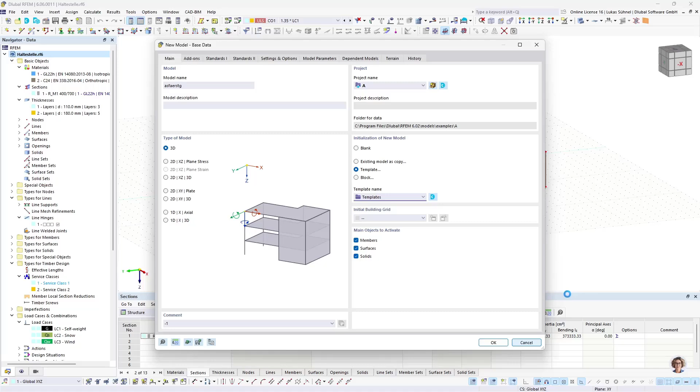And that's the same logic that I use in Grasshopper. Before I run the export of the data that I defined here, I can read the information from a template. And I can link this template via the path. So I go into my Windows Explorer. Now I have to remember where I put it.

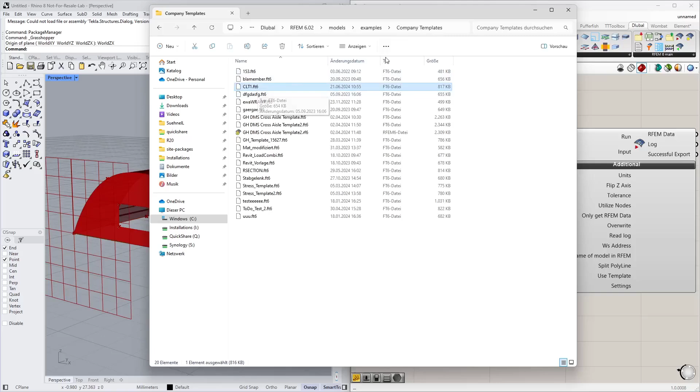I think it's under the programs, Dlubal, RFEM 6.02, models here. Examples, I think company templates, and here's my template CLT1. So I copy the path, put it in a panel, add the CLT1 FT6. FT6 is the ending for templates of RFEM 6, and I link it to my template input.

And now when I run the export, it will read first the information from the template and then the information that I defined in my components. And since it reads the information from the template first, and I defined already a timber class in that template and a configuration for the timber design, I can simply use the index number of that type and assign it to my surface, to my member, whatsoever. So I don't have to define it in Grasshopper, but I can use it from the template.

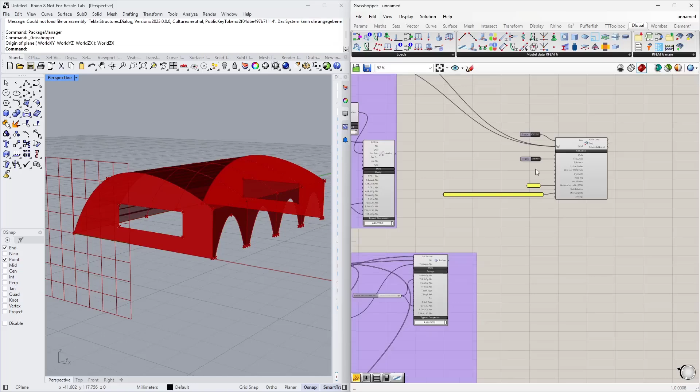So far so good. Let me show the final, oh no, that's not the final, the final algorithm. We did all that here, and a part of the last group. These two definitions are missing due to the time. I think it's anyway clear how I did that. And now we can run the export, and I would like to show that at least once.

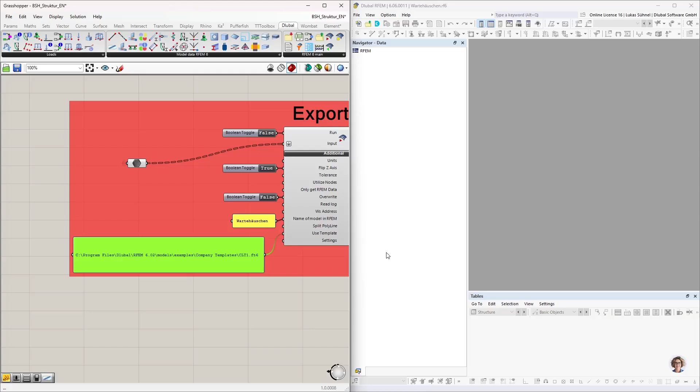So let me put it on the right hand side. I close that file, and now, that's the path to the template, and now I can change it to true, and we should get the file in RFEM. It's creating a connection with RFEM, reading the data from the template. You can see it already here. Load cases and so on are defined. That's part of my template. And then it will create material sections and so on based on the Grasshopper algorithm.

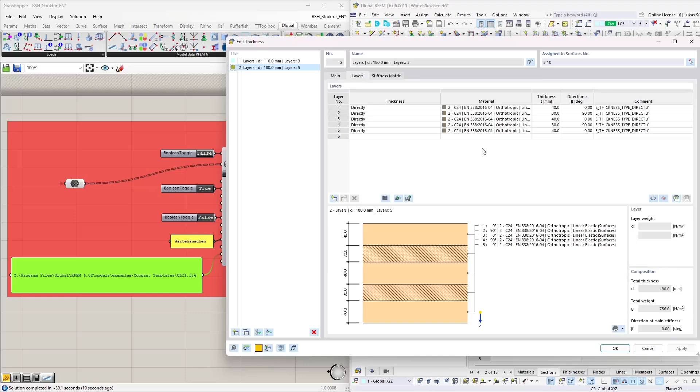All right. I disconnect the connection and I can see my file here. I have the geometry that I expected, my surfaces with the openings, my thicknesses with these layers that I defined before. And that's already a file I can calculate. Let me maximize it for a second. I can generate the mesh.

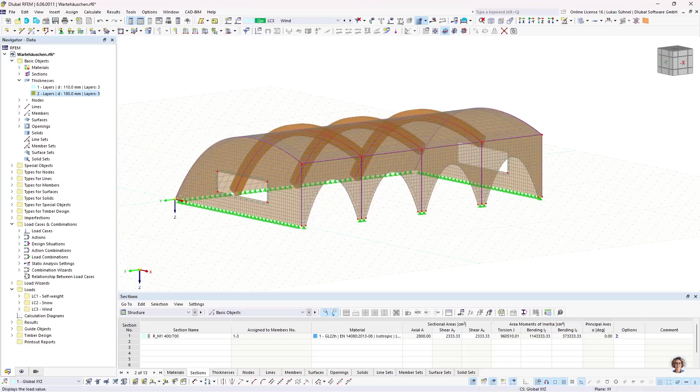In this predefined algorithm, I used the mesh refinement of 0.2 meters. That's why I have just 2 elements and not 3 over the width. But you can clearly see that the mesh refinement has been defined on these walls, except the roof where I have the global FE mesh settings. And we can also see that I have here these line hinges defined, and all the things that I showed here. And if everything is fine, we can also run a calculation and get the results. And this step, running the calculation, can also be triggered via the Grasshopper component. So that's also possible.

All right. That should be it from my side. I hope I was able to show you some new stuff, some helpful workflows, maybe regarding the numbering and the line hinges. And I thank you for your attention.